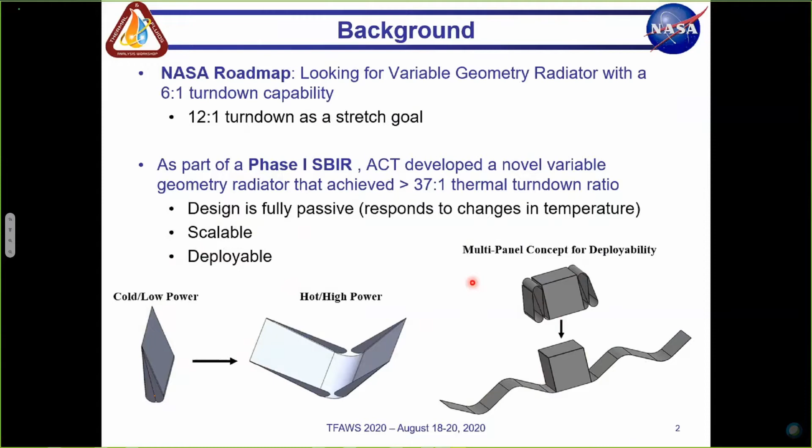Here are a couple of simple sketches of the concept. At low temperatures or low power, the radiator is closed, and as temperature increases, the radiator opens up to increase the surface area available for radiation. There's also a multi-panel concept which is deployable, so as temperature heats up, the radiator expands, increasing the surface area available for radiative heat transfer.

The concept developed by ACT utilizes a curved panel formed by using two thin metallic walls, forming an envelope with a hollow space in the middle, labeled here as the vapor gap.

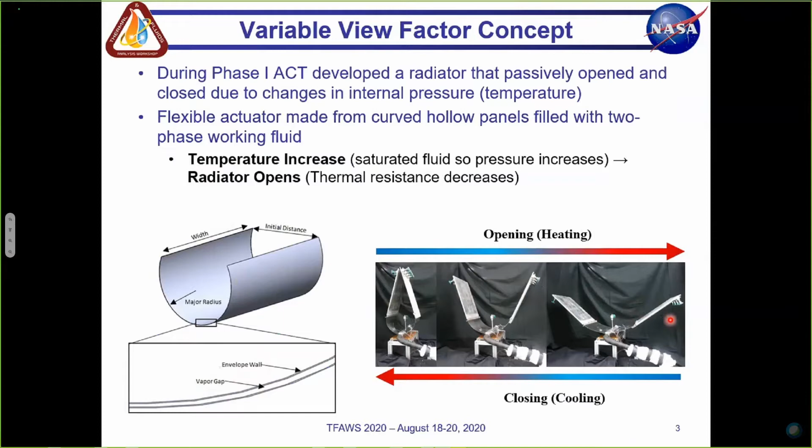Within this hollow space is a two-phase saturated fluid. As heat is applied, this two-phase fluid's temperature and therefore pressure begins to increase, and this increasing pressure causes the curved panel to open up. We can see that in the images on the right. As the system heats up, the curved panel flexes and opens up, increasing the surface area for heat transfer, or increasing the view factor. As it cools down, the system closes back up, decreasing the view factor and increasing thermal resistance.

The view factor is increasing, allowing for more heat transfer. As the system begins to cool down, it will start to close, increasing thermal resistance, with the goal of maintaining the vapor temperature within the system and minimizing temperature swings of your electronics. Eventually the system returns to its fully closed position.

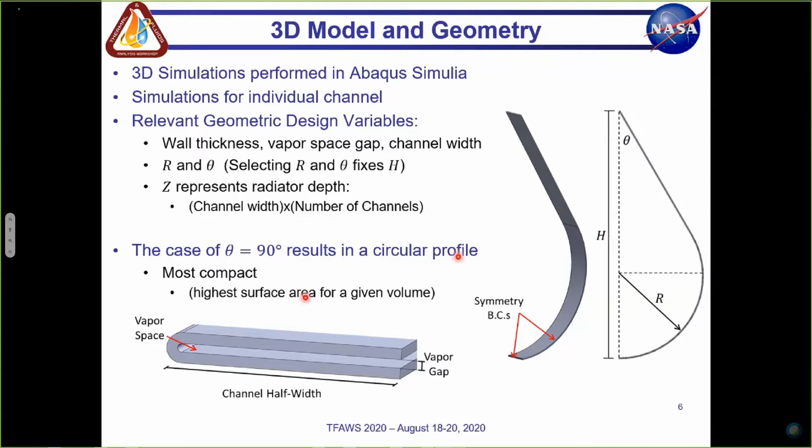Pointing out here that there's a case where this angle theta, when that's 90 degrees, the profile becomes a circle rather than this teardrop shape, and this represents a very compact form.

For these calculations, it's assumed that the end caps are closed at all times. This represents a conservative estimate. Closing the end caps off or blocking them is desirable when the system is closed, but as it opens, we would want those end caps to also allow heat to escape. In these calculations, it's just assumed the end caps are blocked, representing a conservative estimate of the view factor.

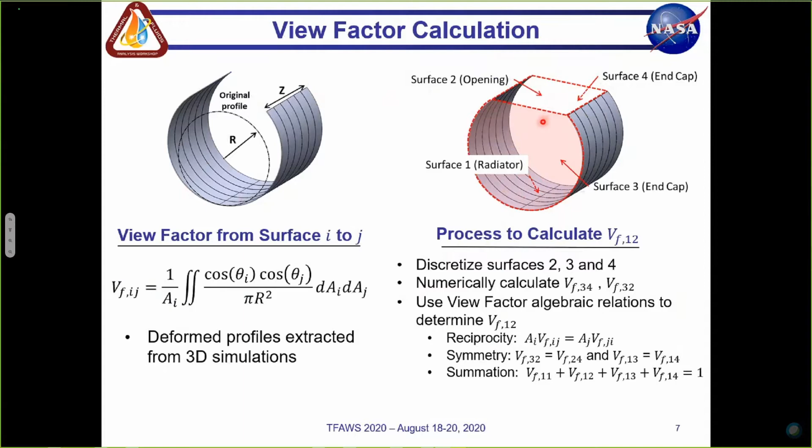I won't go through the math that we did here, but the view factor was calculated by taking the deformed profile, which was extracted from the 3D simulations, and then using the deformed shape, the view factor between surface 1 and surface 2 was calculated.

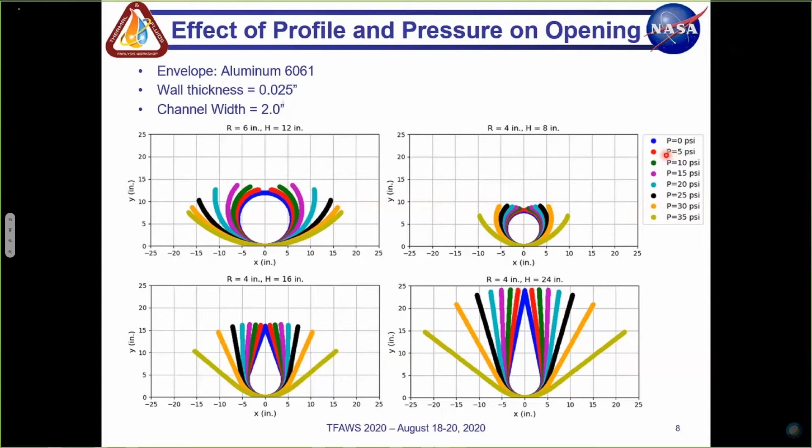We can see here that as the internal pressure increases, the radiator begins to open, significantly increasing the view factor. We can see the rate of the opening with respect to pressure is nonlinear. The larger radius radiator experienced initially a slow increase and then a rapid increase in the opening rate, and then it reduced or decreased again. The 4-inch radius case seems to experience just a gradual increase in the rate at which the panel is opening.

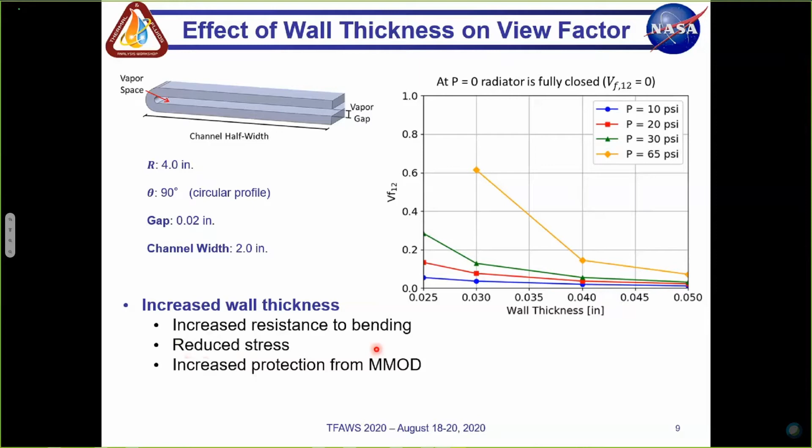In addition, though, there are trade-offs. A thicker wall would also help to reduce stresses and contain the pressure within the envelope. It also offers increased protection against micrometeorite damage. So again, if one of the panels leaks, we would lose some of our ability to open the system.

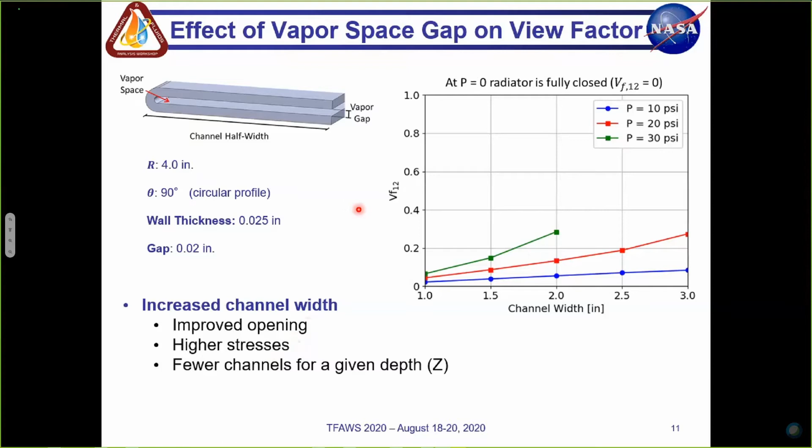However, this will lead to higher stresses and potential ballooning, which may need to be contained using spot welds. And then we also have fewer channels for a given depth of the radiator, and so this might reduce the reliability of the system. The fewer panels or strips that we have, the larger penalty we might pay if one of the strips were to leak.

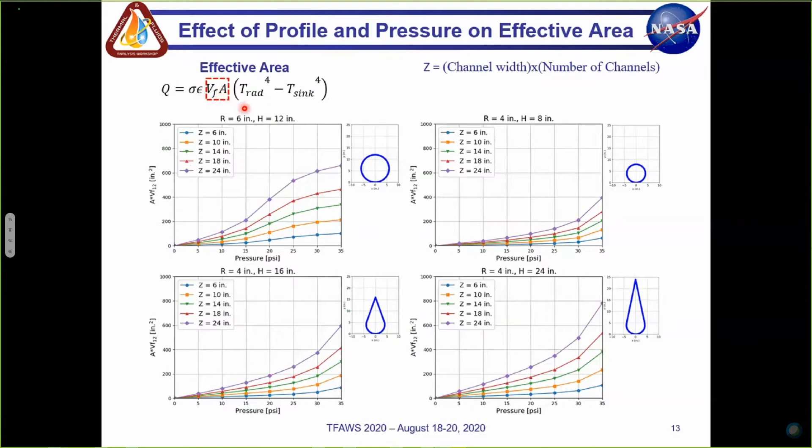Another useful way of looking at this, rather than simply the view factor, is the effective area, or the product of view factor and area. Looking at our equation for radiative heat transfer, this product is a measure of the thermal conductance of the system. So now when comparing these values for the different profiles, we can see significant differences. For example, comparing the 6-inch radius profile to the 4-inch radius, even though they had comparable view factors, because the actual physical surface area of the 6-inch radius profile is larger, we have a much higher effective surface area available for heat transfer, and therefore lower thermal resistance if all other variables are kept equal.

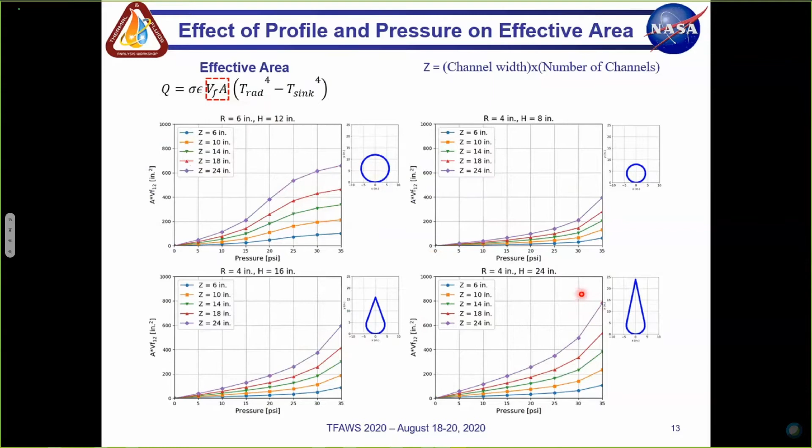Similarly, looking at the different teardrop shapes, we can see that increasing the height of the panel will also result in a significant increase in the effective area available for heat transfer.

Using the simulation results, we performed some preliminary thermal modeling. We wanted to see how the temperature of the system changed as the environmental conditions were changed. Some assumptions here: it's assumed that the entire internal surface is isothermal, which is a reasonable assumption because we have a saturated two-phase fluid within those channels, which should be at a constant temperature. And in this model, we're assuming right now that the outer surface is perfectly insulated. So in this model, we have radiative heat transfer from the inner surface, and then thermal resistance from the vapor to the sink.

So this accounts for a term for condensation on the inner wall of the radiator, conduction through the envelope, and then resistance from radiative heat transfer.

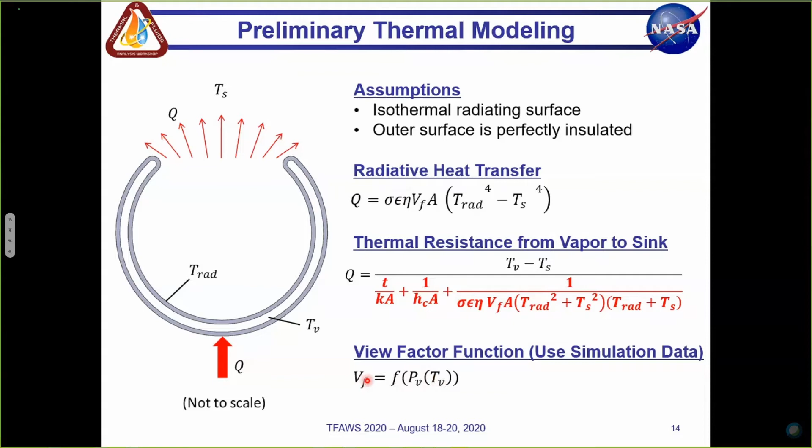In these equations, the view factor term was determined from the simulation data. The simulation data provided view factor as a function of pressure, but because in a saturated fluid the vapor pressure is related to the temperature, we can relate the view factor to the vapor temperature.

In order to perform these calculations, we had to make some choices for some values. It's assumed that we are dissipating 40 watts, a maximum allowable vapor temperature of 60 degrees C, and a sink temperature ranging from minus 130 to positive 20 degrees Celsius.

The required effective area to dissipate Qmax, or maximum power, into the maximum sink temperature is 234 inches squared.

You can use this information and the simulation data to determine the appropriate depth of the different profiles necessary to dissipate this load. For example, it was assumed that pentane was the working fluid.

Pentane was selected only because at the maximum selected vapor temperature, pentane's vapor pressure was within the range of the simulated data. This isn't to suggest that pentane is necessarily the best choice, it just fit within the simulated data that we already acquired.

The plots here show that for the 4-inch radius circular profile, in order to dissipate 40 watts at the maximum temperature into the maximum sink temperature, you would require a depth of approximately 24 inches to acquire the necessary effective area to dissipate the heat.

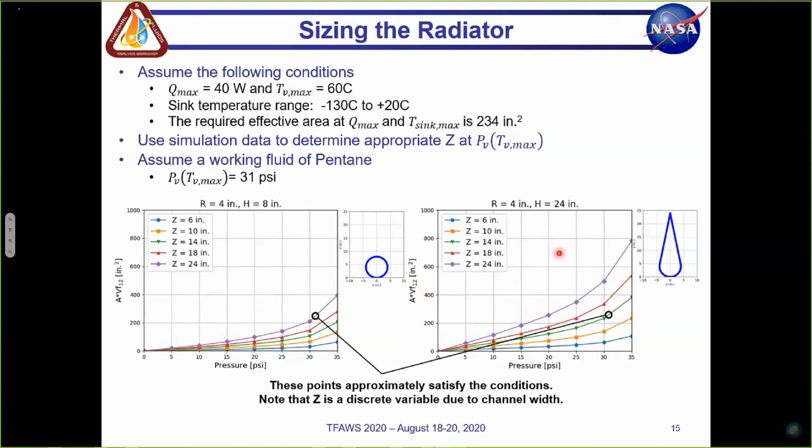We can then size the radiator using these plots. By going to the teardrop shape and extending the height of the radiator, we can obtain the necessary effective area at a shorter depth of only 14 inches as opposed to 24.

Similarly, we can determine the necessary depth for the other two profiles as well.

The plot here on the top left shows the variation in vapor temperature within the variable view factor radiator as a function of sink temperature for those 4 separate profiles.

On this plot, the black dashed line is a standard radiator. This is a simple flat plate radiator with a view factor of 1, but this view factor is fixed.

There is no changing geometry. We assumed a radiative efficiency of 0.85.

This flat panel was sized to dissipate the 40 watts at the maximum vapor temperature and maximum sink temperature. So we can see the flat panel radiator, which is unable to vary its thermal resistance, sees a large temperature swing in the vapor.

Of approximately 60 C as the sink temperature varied from positive 20 to negative 130. The 4 different variable view factor radiators, however, saw much smaller temperature swings of approximately 10 to 15 degrees.

On the right here, we can see this was a plot of the view factor versus pressure for the different profiles. Looking down here, we've listed the actual physical surface area required by these different radiators.

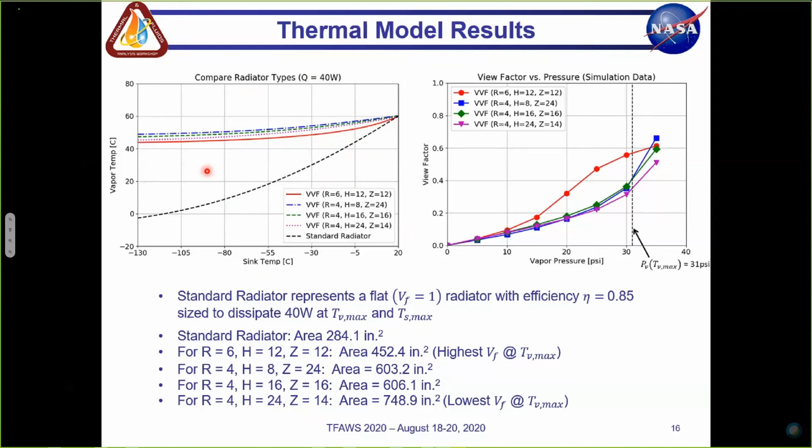We can see that the variable view factor radiator is capable of maintaining a relatively constant temperature despite a very large change in the sink temperature.

Now, because the maximum view factor of these variable view factor radiators is less than 1, they do require a larger overall surface area compared to the flat panel radiator.

Despite this fact, one of the advantages of the variable view factor radiator, as we just saw, was maintaining a narrow range of operating temperatures, but it will also allow for a reduction in heater power requirements during survival mode. As an example, if our electronic survival temperature happened to be negative 30 C, represented by vapor temperature, at a minimum sink temperature of negative 130 C, the standard flat panel radiator would require approximately 25 watts of heater power to maintain the vapor at or above minus 30. The variable view factor radiator, however, would only require approximately 1/3 of a watt of heater power, due to the significant increase in thermal resistance.

At negative 30 C, the view factor of this particular radiator is approximately 0.005. This could be reduced even further, all the way down to 0, by simply extending the length of the panel slightly so that it's fully closed at your survival temperature.

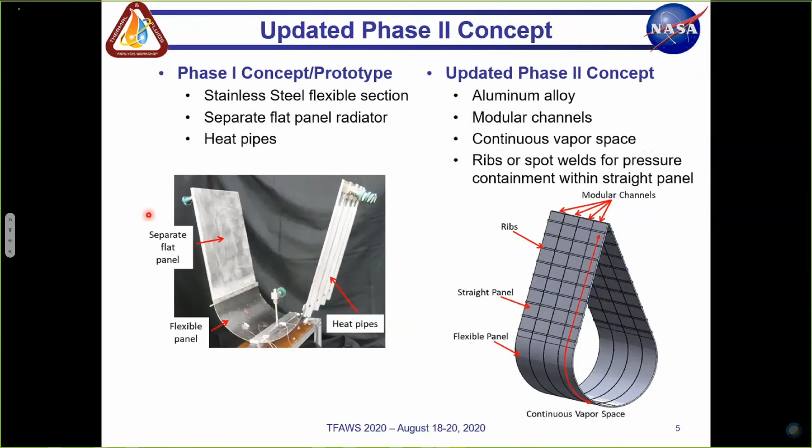Yeah, we're sure that gravity was playing a role in how much it opened in phase 1. In all of the simulations, gravity is not included, so we would expect that we wouldn't get the benefit of gravity helping to open the system, and we'd have to rely entirely on the internal pressure. That's how the system is being designed. But also, if we go back and look at the picture in the video here, this prototype, gravity is going to play a stronger role than it would in the updated concept I've been talking about, because this flat panel with heat pipes attached is significantly heavier than the equivalent flat panel portion of the new radiator, which is just made up of two sheets of very thin aluminum welded along the edge. So gravity would play a smaller role in the updated concept than it did initially, but we're designing the system assuming that gravity is not helping to open.

Okay, we've got another question. How long did it take to transition from open to close and back during testing?

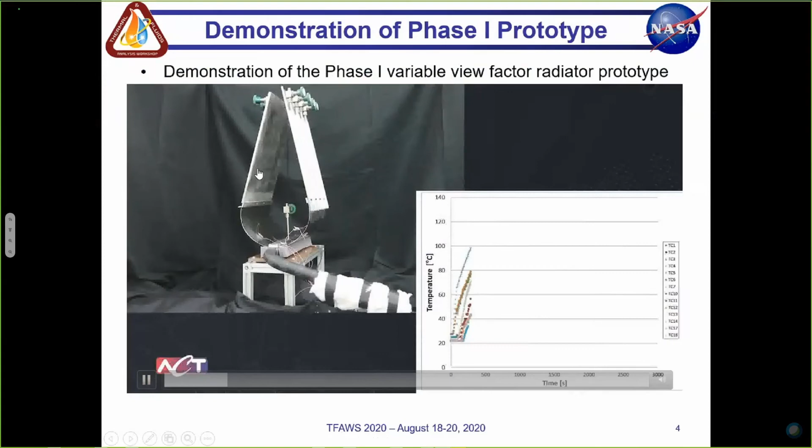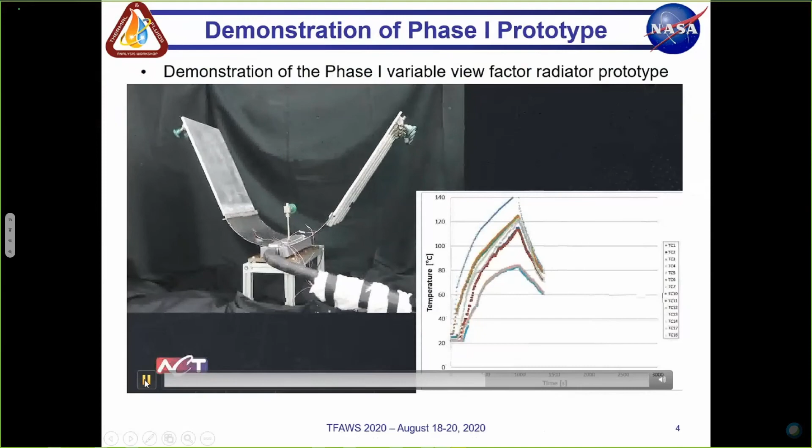Well, it's going to be a function of how rapidly you're applying heat to the system. This system here was simply at ambient, with a heater connected. I'm not sure exactly what the power was here, but you can see on the x-axis of this plot is time, and you can see this video is sped up. This is happening over tens of minutes. But again, if heat were applied faster, the system would be capable of opening faster.